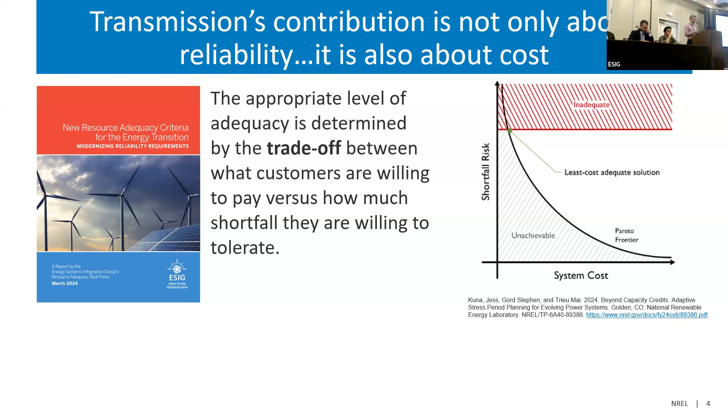This just changes a little bit how we consider the metrics for interregional or transmission in general, rather than just thinking about shortfall risk and our metrics for outages. We're also thinking about what is the cost to meet our target, in terms of dollars of capital investment and things like that.

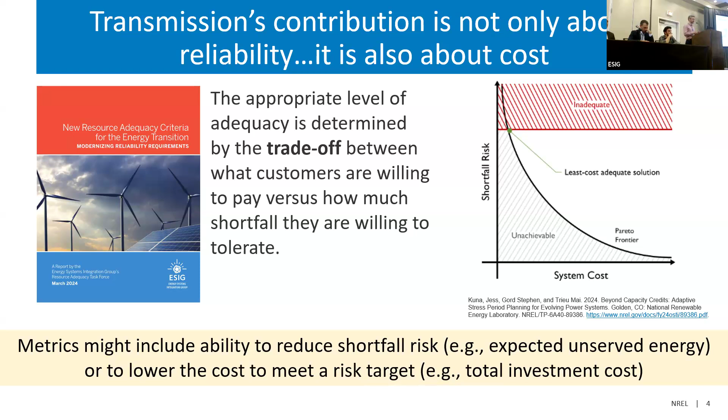I want to talk about a framework we've been using to explore this problem, linking capacity expansion modeling to examine this cost reliability trade-off in transmission. The approach is: you take a capacity expansion model and you have a reliability target, and you build a system that meets that target.

When you do that, you need to have some linkage with a resource adequacy tool to tell you, did you get to your target? Because usually the capacity expansion model is using a heuristic or a soft linkage to your RA evaluation metrics. So you use your resource adequacy tool, assess your shortfall risk, and then you can plot it. Here's where this particular build out landed.

Now you can go back and repeat this process, but establish it for different reliability levels. I'm going to change my planning reserve margin and see what I get, and I get another point. Maybe this is a system with a higher PRM, but now it's going to cost more, and it's going to have higher reliability. You do this again, you get another point. You get the idea. You're building out this curve, this Pareto frontier of what is possible in terms of cost and reliability.

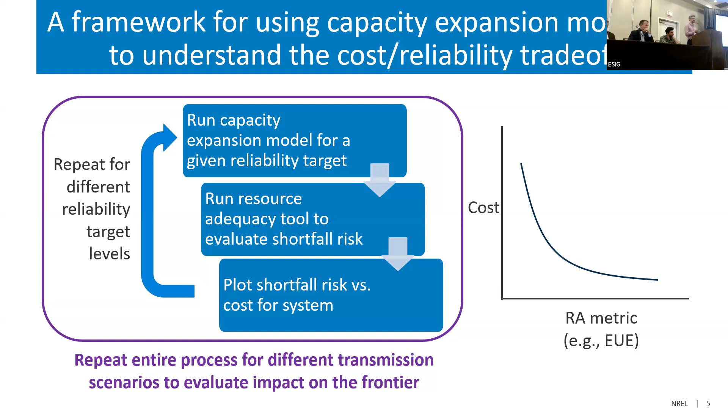But now we can take that whole process, put it in a box, and say let's rerun it, but for different transmission outcomes. Let's look at what is feasible in terms of different transmission buildouts. Maybe we have more restricted transmission siting cases, or we restrict the ability to build interregional transmission. When we do that, we're going from this base case to this other Pareto frontier. This is a world maybe we can't build as much transmission. We've now shifted this curve upwards in some way where we have a different kind of trade-off scenario between cost and reliability. That's the high level framework we're thinking about here.

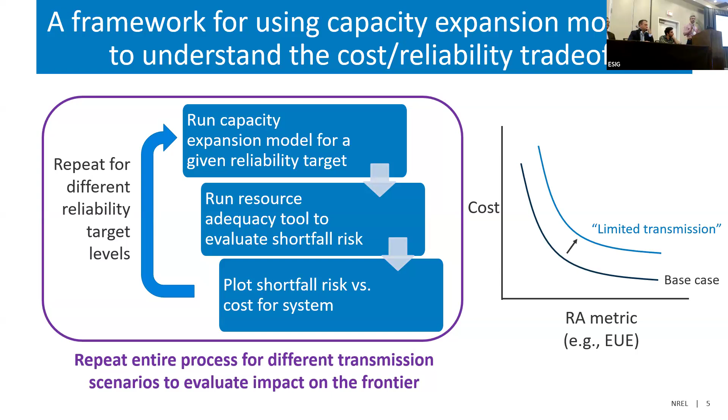We took this framework and applied it specifically to some of our modeling tools at NREL. This is particularly the ReEDS capacity expansion model that we're building from here. What we do is take ReEDS, which solves your capacity expansion problem for different steps. An input to that is your initial reliability target. In this case, a planning reserve margin that you want to satisfy, typically on the order of 12 to 18% above your peak load.

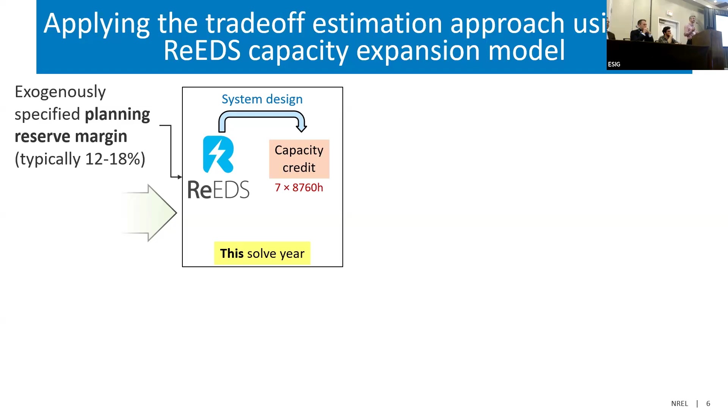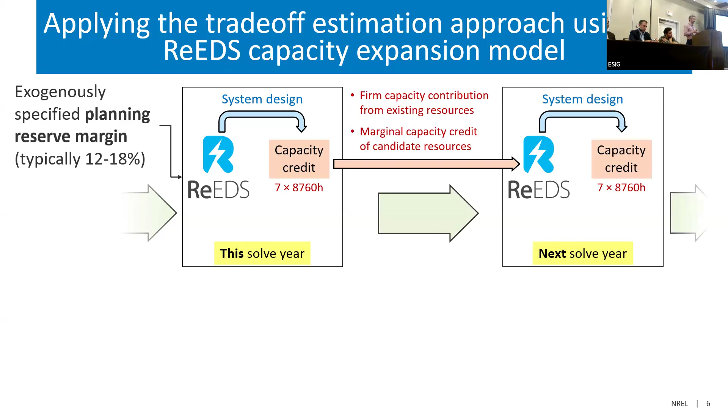And you've got your system design that comes out of ReEDS. You evaluate it against our resource adequacy analysis. Here is just a capacity credit calculation that then feeds into the next solve year. So we take firm capacity contribution from the resources you build out, as well as information on what the marginal contribution for future resources would be. That goes into the next solve year and so on. This is the linkage we have in our base ReEDS model for building out a system and then evaluating its performance.

Once we do that, we can take the final build out and do a more detailed resource adequacy analysis on it using a different set of tools. This is a resource adequacy tool called PRAS, also developed at NREL. The advantage of this over ReEDS is it has the ability to conduct probabilistic analysis with many draws from different outage probability failure rates. So you're capturing some of the correlated risks that you don't capture in the capacity expansion model. From that model, we can get metrics like expected unserved energy, and in this case I'll show normalized expected unserved energy for the system build out.

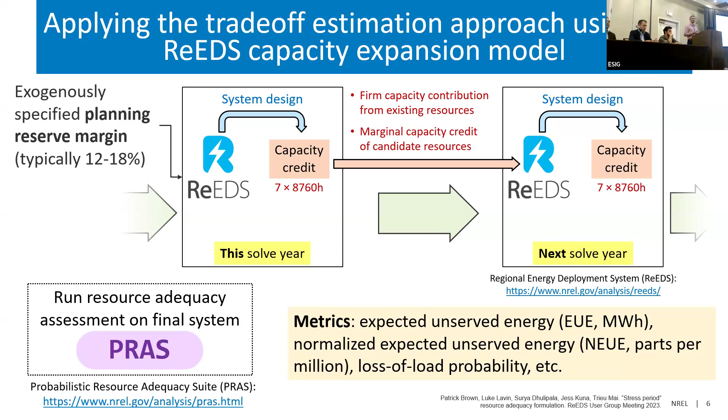And then a really extreme case is just no new transmission at all. We also study the impact of the different transmission scenarios on these Pareto frontiers under different emission scenarios - looking at a business-as-usual case, but also a zero carbon case where we're trying to achieve a zero emissions target for the system.

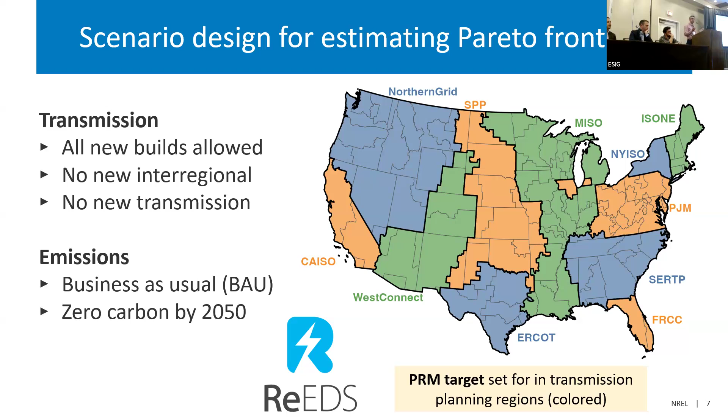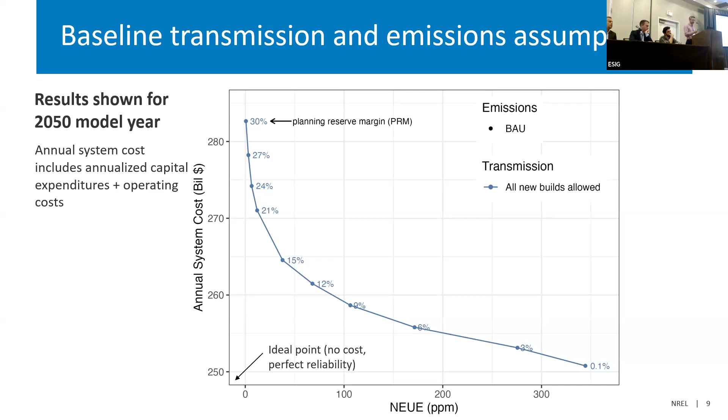A 15% planning reserve margin is maybe one I've often thought of as a baseline level. You can see here that at that system, you've got an annualized system cost of 265 billion, but more importantly, a normalized expected unserved energy of 38 parts per million. This suggests that 15% is missing some things in the model - that planning reserve margin is not capturing some of the outages that we're seeing in a probabilistic resource adequacy model. So maybe that's not getting you far enough along if your goal is to get to a lower expected unserved energy than that.

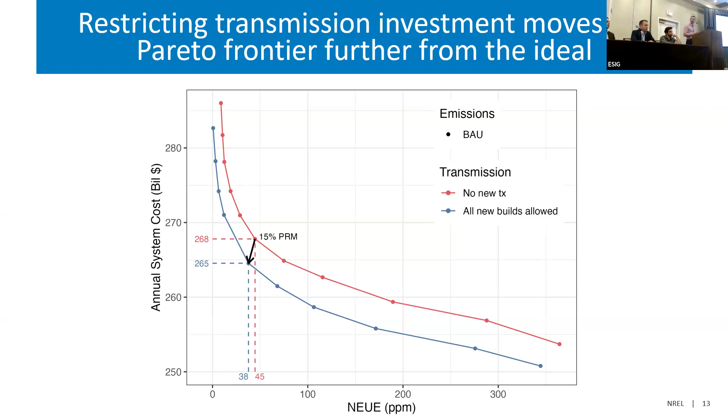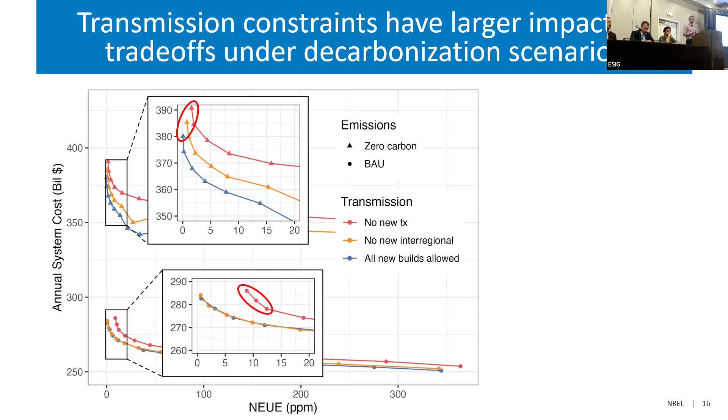And then if you look up here, you can basically see it: even at high levels of reliability, under the deep decarbonization cases, you're getting about a $10 billion annually difference in how much that system would cost when you are taking away the option to build new transmission. For context, it's $180 billion annually estimated for capital expenditures for all investor-owned utilities, and 20 to 25 annually in transmission expenditures. So this feels like a fair amount of money relative to what the system has to build out, and again just suggestive of the importance of transmission for this cost-reliability equation.

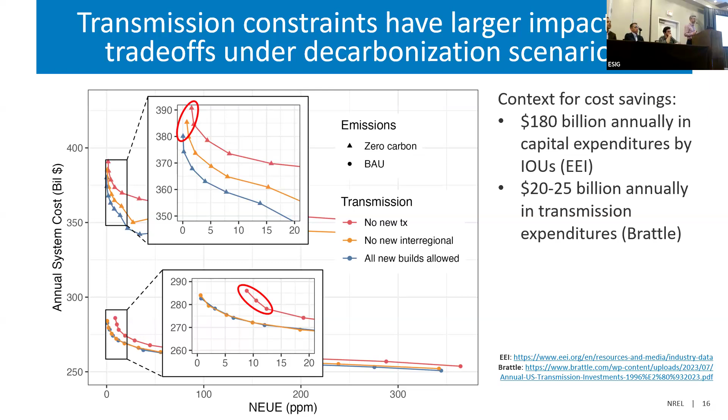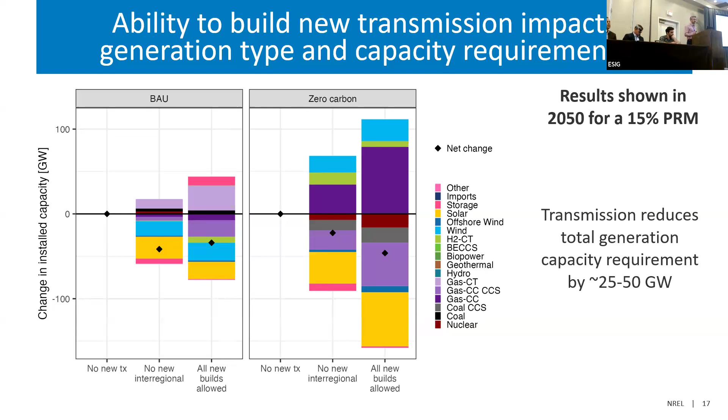In the BAU, that helps displace some mix of resources with the ability to build a little bit more CTs as peakers. But in the zero carbon world, that results in being able to completely offset gas CCS in favor of combined cycle that's utilized a little bit more effectively, enabling more wind. Overall, we're seeing a reduction in 25 to 50 gigawatts of capacity, so that's a consequential impact as well.

So just to close out, this is sort of an ongoing effort. I think we have a lot more work in this space that we're interested in doing. We'd really like to explore this trade-off estimation approach with a wider suite of scenarios. What happens if there's more demand growth because of electrification? How does this change in different weather years? What's the interaction of transmission and wind siting availability and deployment opportunities?

Also doing some more resource adequacy focused work, where you look at a specific transmission corridor, maybe remove it, and look at the impact on resource adequacy, but doing that for some of these future build-out systems. And then lastly, improving coupling between capacity expansion and resource adequacy tools. I'll talk about this in just a second, but we have more work in that space. That said, we're really interested in suggestions from folks on where this research stream should go.

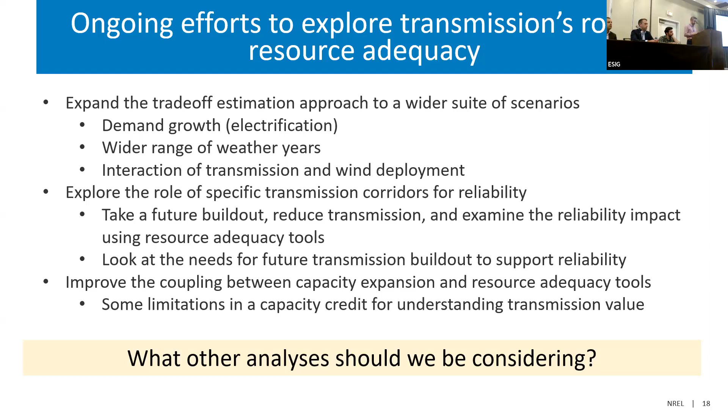And then just to close out, to touch on that last piece: the approach I presented today is using the traditional ReEDS formulation, which involved solving the capacity expansion problem and then calculating capacity credits for those solves, and moving forward in time.

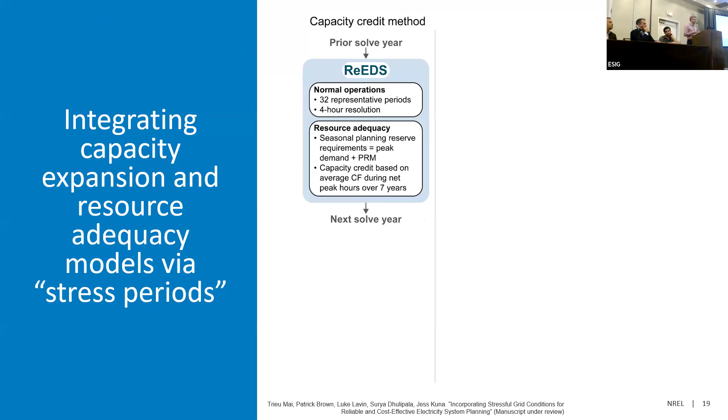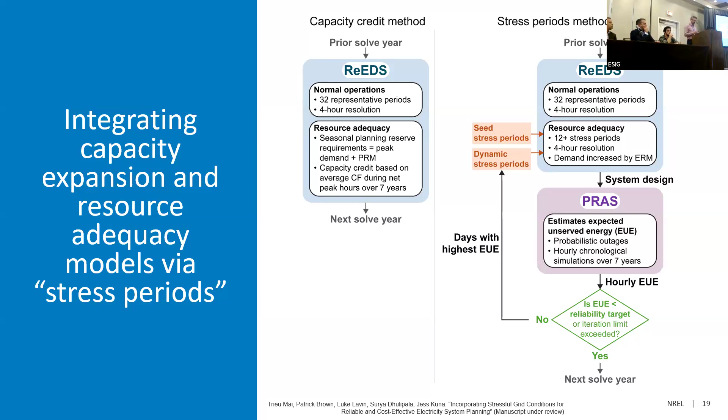But that has some limitations, particularly for assessing the value of interregional transmission. So we've been working on a new approach where we directly integrate the probabilistic resource adequacy tool and have feedback where we generate new periods to model directly, trying to capture some of that outage representation. That's where we think we're headed, and something we'd like to continue exploring, particularly in the context of interregional transmission. So with that, thank you very much for your time, happy to take questions throughout the session.

All right, hi everybody, I'm John Moura, Director of Reliability Assessment at NERC, and I'm going to talk about our interregional transmission, interregional capability study, the ITCS. I'll say that a couple times.

Thinking about it at a high level, think about what's needed for the system as we're growing, seeing more extreme conditions, the need to solve issues that can't be solved internally because of resource mix options we're constrained with, but also being able to integrate resources that want to come to market that might be distant from load. So I think it's important to set the table a bit.

And talk about why this is on our mind and why this has become more of a challenge in the past, especially the past 10 years. Setting the table, over the last 10 years across North America, we've really reduced the amount of capacity on the system when you look at peak. And that's kind of hard to grasp, right?

We built so much solar, so much wind. How can the actual capacity go down? But of course, we've retired a lot of units. And when you look at that on-peak capacity component, particularly during the winter, we've actually decreased the total amount of capacity on our system by about 4%. I'll go top left and then bottom left here.

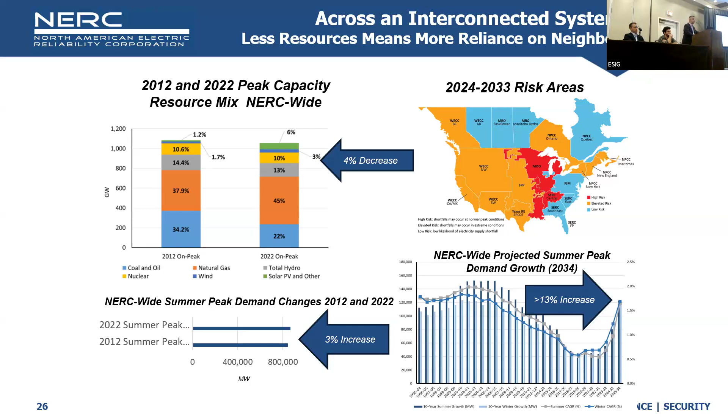And so there's a couple pretty good examples that get us into these tail events where interregional transmission is really the one solution that we know how to do that can really help. So with our wind group here and renewable group, I don't know if anyone knows what happened on June 6th of last year. Most people don't know, and that's because the system operated and performed as expected.

But on June 6th of last year, if you look from the bottom of Texas all the way to the top of Saskatchewan - that large swath of the country - there's about 60,000 megawatts of wind installed in that area. And on June 6th, it was outputting about 300 megawatts.

I know we have some international folks - I don't know if any German - but the Germans have a word for this, it's called a Dunkelflaute, a kind of energy drought, I heard at the last session. And these are things the Germans see, right? They've got a lot of wind, a lot of solar, and it's something we need to be prepared for. It's part of our design criteria that we really need to be able to operate the system even when we don't have sun, when we don't have wind. What are the resources we're going to rely on from our neighbors to maintain reliability?

And of course, I should mention, very different story, right? If that happened in July 6th or August 6th, when you didn't have enough excess generation from our neighbors and you're kind of limited in options.

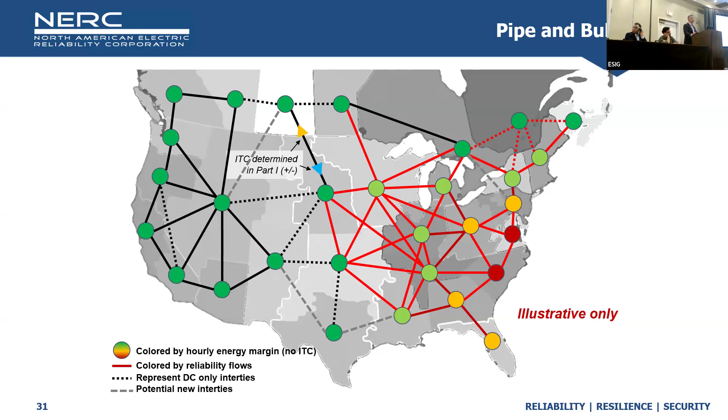This is just an illustrative version of what our study looks like. You have the bubbles that look at the energy availability within each area. If it's deficit, it's red. If it's in excess, you're green. That's kind of the energy part of the study. And then what we do is the transfer capability part, identify recommendations for prudent additions, and where there are deficits, we look to their neighbors to see if there's excess at that right time and right place. And then if there is, we're able to recommend those prudent increases.

I'll just quickly flash this. This is just import capability for a summer peak. You can see they're all over the place, ranging from 1% in Texas. I think we know that. But very high in other places, 92% in the Northwest and others. And we kind of understand that, right? The Western system's kind of built for that.

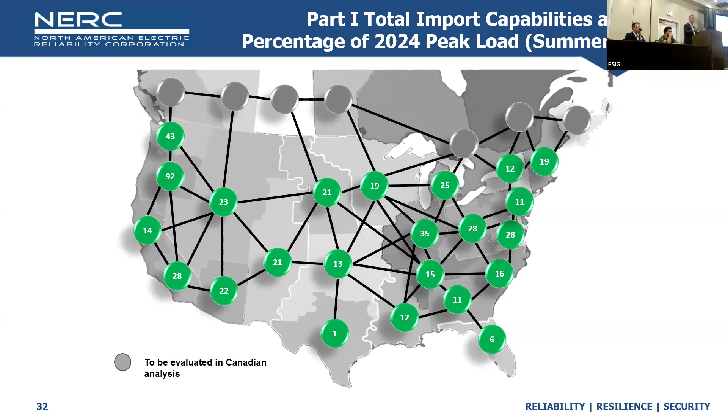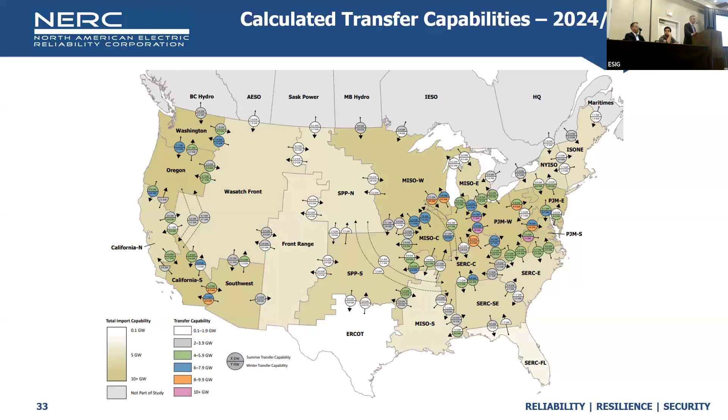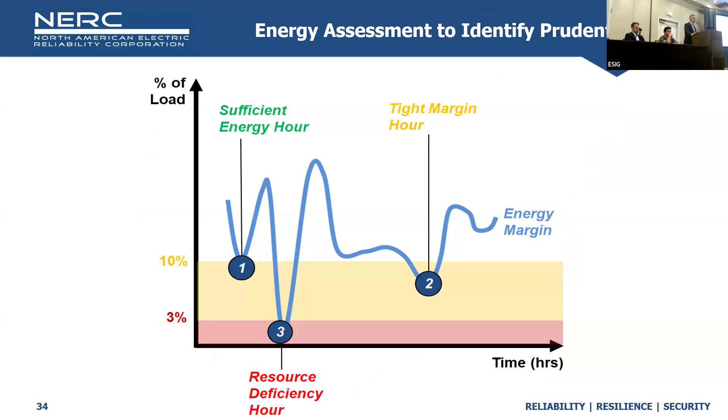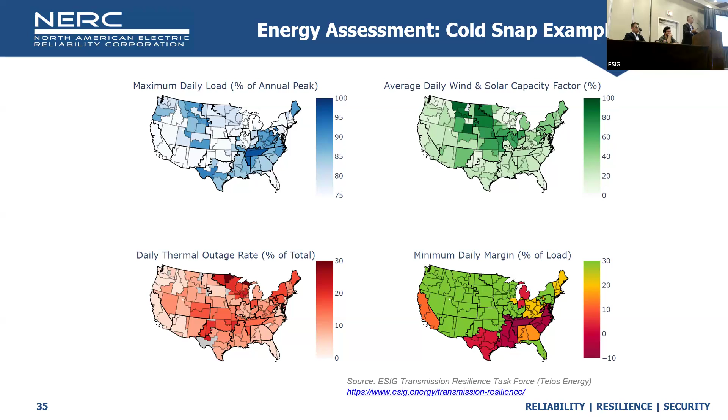Behind every one of those bubbles, we're identifying areas where there's a resource deficiency and highlighting that as a need. We do hourly forecasting, hourly modeling to take into account the daily loads. We've got 12 weather years that are synchronized with load and resources. We're looking at wind and solar capacity factors, the daily thermal outage rates, and we're ultimately able to get to some energy margin level. Take all that, keep going, and give you some results here.

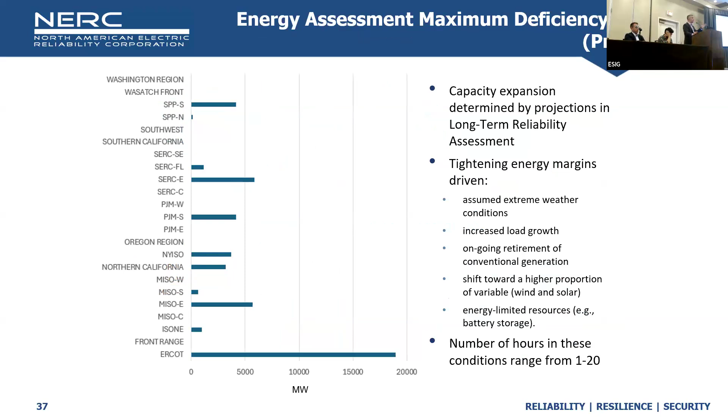So in some areas, these are the energy deficits that were identified. They range here. Most of the energy deficits are in that slightly less than 5,000 megawatt range. But a couple stand out. ERCOT, of course, mostly because of the weather year of Uri that really drove a lot of the resource deficiencies.

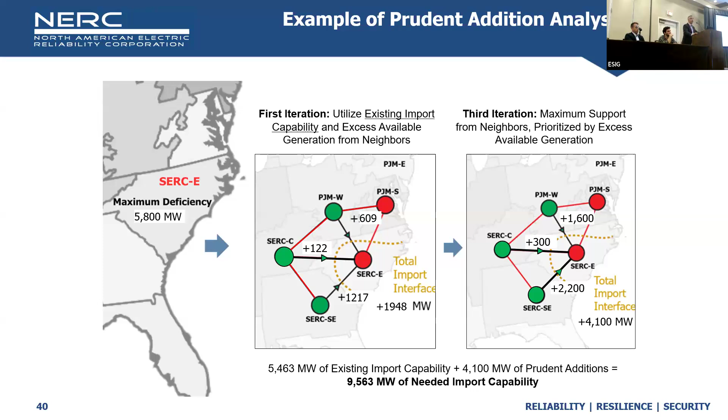So some really good insights around how storage, demand response, all of these things that we can move around can actually minimize the need for transfer capability.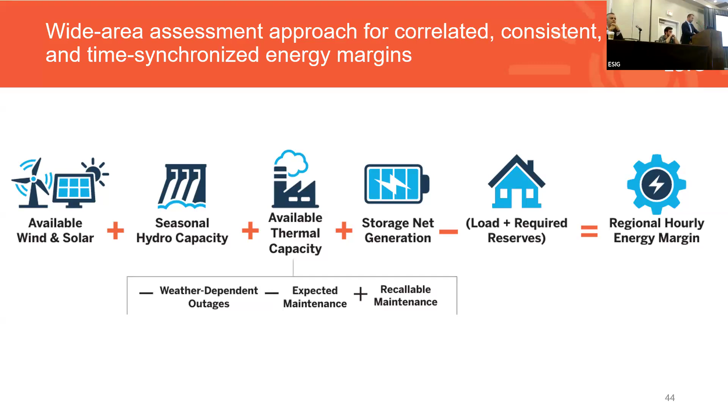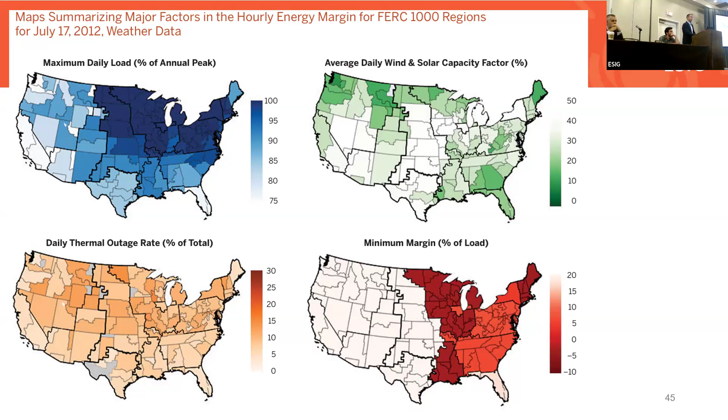And so this is showing that geographically across the whole country, and we actually have Canada included as well. Just simplified the chart. And this is for one point in time. Now we replicate this every hour across 12 weather years, and we're getting this full 100,000 hours plus of what resource availability looks like for each region and the transfer capability between them and how we might see some of these reliability flows.

Now, I talked about how we can combine this with the resource adequacy criteria report. And so in the ESIG RA criteria report, there's 3 main recommendations that came out of that. One was to transition to a multi-metric criteria. 2 is to specifically consider extreme events. And the 3rd was to incorporate economics. I'm going to focus solely on that middle one. Like, why do we have to think about specifically considering extreme events?

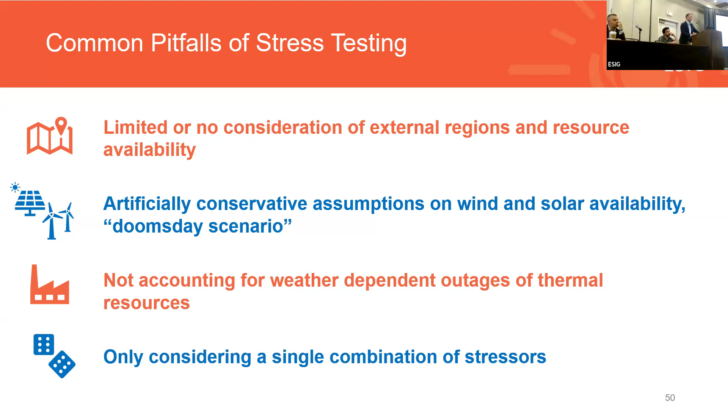There's a few other things, but we wanted to apply this to an SPP case study. The reason for this was twofold. One was to really bring this into a planning process and get more specific about a region. But another was to inform how we take some of these wide area assessments, like the work John was showing that said here's the entire North American system, and then how do we take that framework but apply it to a regional planning study.

I think John and anybody else doing these wide area assessments will be the first to say those are not meant to replace local or regional planning. They're used to inform it. So how do we use that wide area work and then insert it into a regional planning model?

Oftentimes you'll see folks like SPP or MISO model their system in a high degree of fidelity and then make approximations, basically saying we're going to assume no more than 4,000 megawatts is available from the neighbors. How can we marry the best of both worlds?

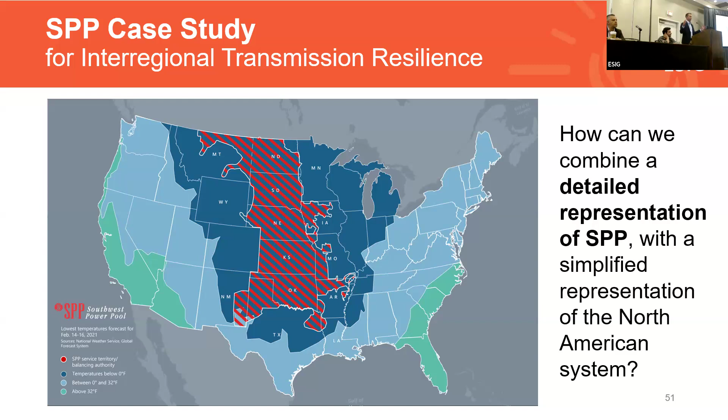What we tried to do here is really in-depth modeling of the SPP footprint, but bring in that energy margin assessment from all of the neighbors. So we could say, when we're evaluating SPP's stress conditions, what do all of the neighbors look like? SPP is a great case study for this because it has a lot of neighbors, spanning a lot of different geography and a lot of different weather zones.

So to do that, we looked at three stress tests. One was an extreme cold event, Winter Storm Uri in 2021. The other was an extreme heat event in 2011. And each of these we looked at for a two-week period. Another one was a wind drought very comparable to the one John referenced.

So we took those each for two-week periods and ran them through 50 stress samples. We looked at them with different combinations of thermal forced outages, renewable generation, maintenance, and transfer capabilities from outside, and also different load levels.

The key thing here is we took those deterministic stress tests and brought in some variability around that, but made sure to preserve what was happening in all of the neighboring regions. So when we sampled different levels of renewables, we did that in a consistent manner that preserved the geographic correlation with all of its neighbors.

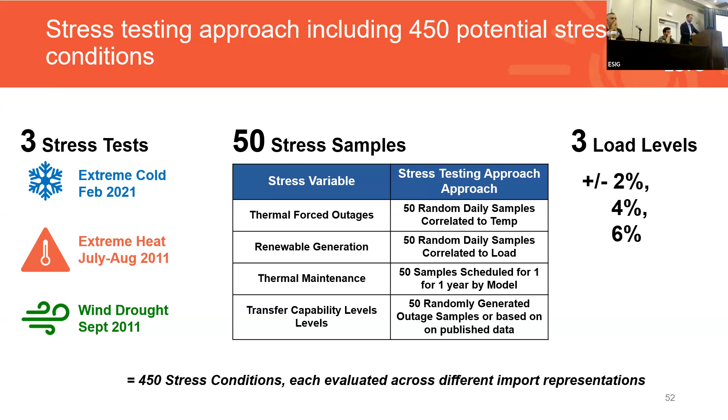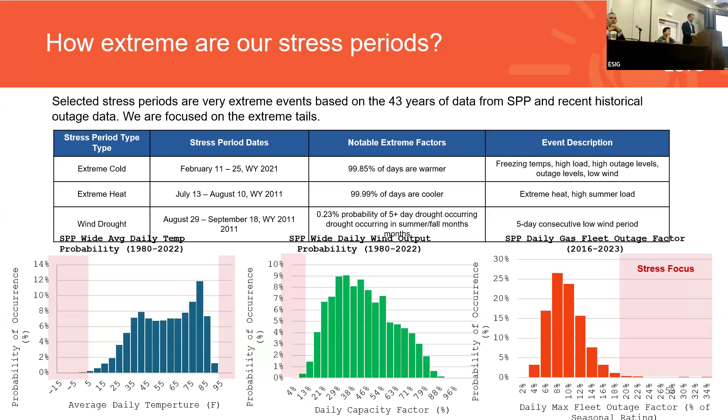When we think about transmission for resilience, we want to look at these periods in particular and ask: what's the availability of resources on the other end of that line? When we do rely on the resource, how often do we rely on it?

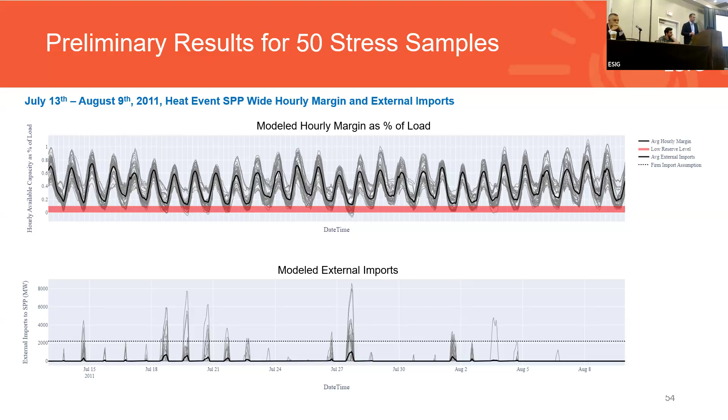This work is in progress. We have a little bit more to do to finalize the stress test conditions and really evaluate those interregional transmission options, and quantify the availability of those external resources compared to in-region resources. We want to consider future systems, applying this to a higher renewable, higher electrified scenario.

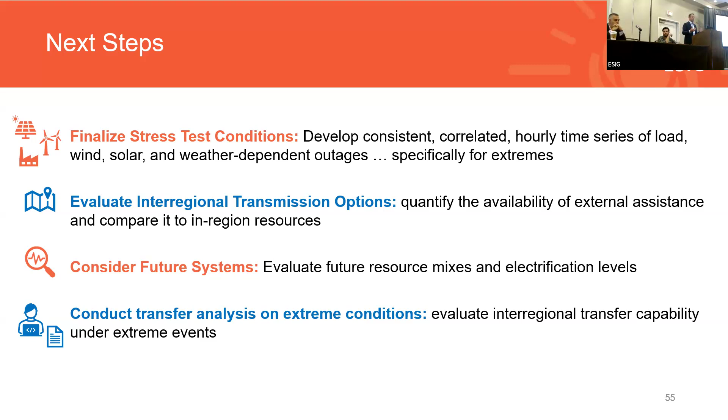Hopefully in maybe a part 3 we can understand the transfer analysis during those extreme conditions. The work John was showing talks about the transfer analysis between one region and another, typically done on our standard summer and winter peak. We want to look at whether, during these specific stress conditions, that transfer capability changes significantly.

All right, thank you very much.

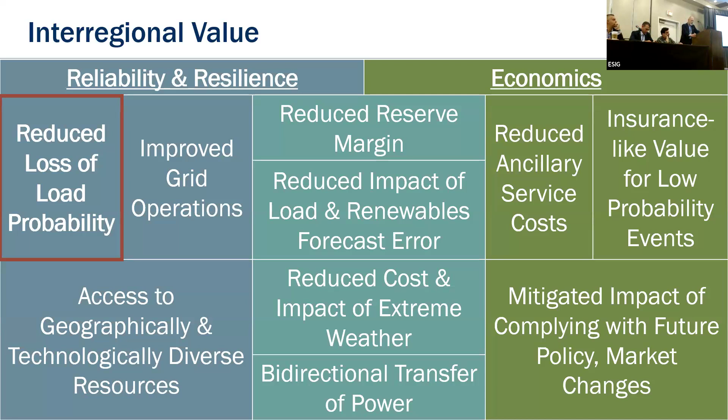So when the Pacific Northwest is peaking, what's happening in SPP and MISO? You can see that they're approximately 80% of their peaks. Similarly, when you look at SPP peaking, the Pacific Northwest is only about 87% of its peak. Same thing with MISO — when MISO is peaking, the Pacific Northwest is at 84%.

This is from the DOE National Transmission Planning Study and shows that the load is not coincident in these regions. So that's one metric into a loss of load expectancy.

The other metric is that nowadays all of our regions are dependent on variable generation, and variable generation is also dependent on the weather.

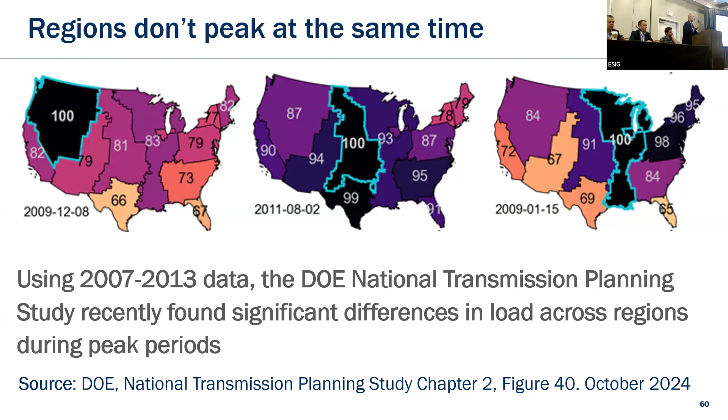So then what we did was we hired Astrape Consulting to perform a loss of load expectancy analysis. This is kind of the pipe and bubble diagram. What's interesting is in their pipe and bubble base case, they didn't even have connections between MISO and WECC, so they had to create some new connections.

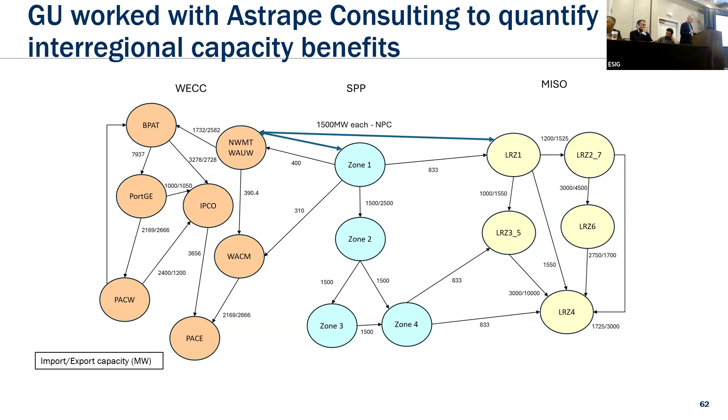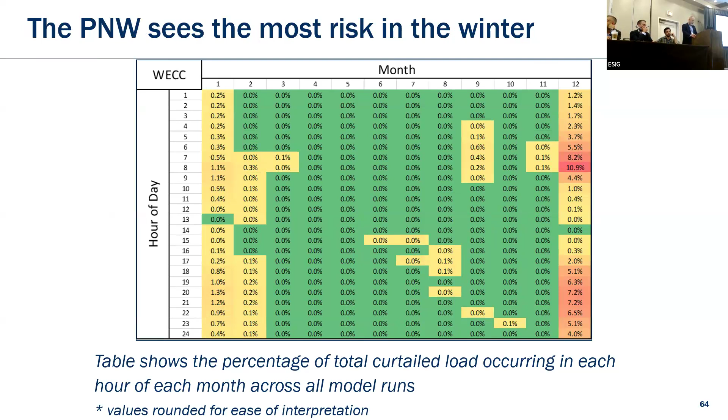So this is kind of leading up to the results, and you look at the results that are post and pre, and they're phenomenal, right? They go from 0.1 to 0.02. That's huge, right? 5x. That's a tremendous difference. The problem is I have no idea what these numbers mean. But it's important, right? They're important.

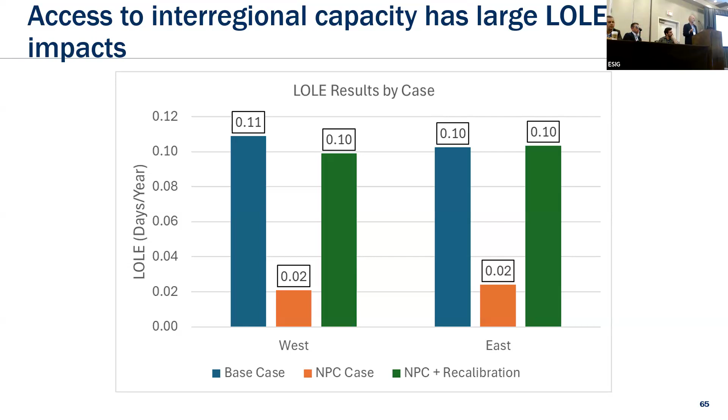I mean, how do you translate it, right? So I asked my team, guys, you got to make this understandable, right? So the team went back, and what they did was they went into the base case and started inputting perfect generation, to see that, okay, if the systems were still disconnected, in order to see that same decrease in loss of load expectancy, how much generation would you have to add to the system to achieve that same reduction, right?

Well, I understand this. I understand megawatts, right? So the impact of the interregional line is the West is seeing almost 1,800 megawatts of capacity, and the East is seeing 1,750 megawatts of additional capacity just from this interregional line. And it's pretty amazing because the line is only 3,000 megawatts. When you add the two together, that's more than 3 gigs, right?

But it's consistent with a previous, I think, a DOE study or NREL study that showed what happens when you connect MISO South and MISO North. The other amazing thing here is this value is understated because this is perfect capacity, right? And generation has a forced outage rate of 5%, right? So this value is actually more than that.

But for us in the United States, this is a huge paradigm shift. How can transmission lines have capacity associated with it? That's kind of heretical almost. But that's what's done in Europe. We call our lines interregional lines, they call them interconnectors. And when they build their interconnectors, they actually assign a capacity value to it, right?

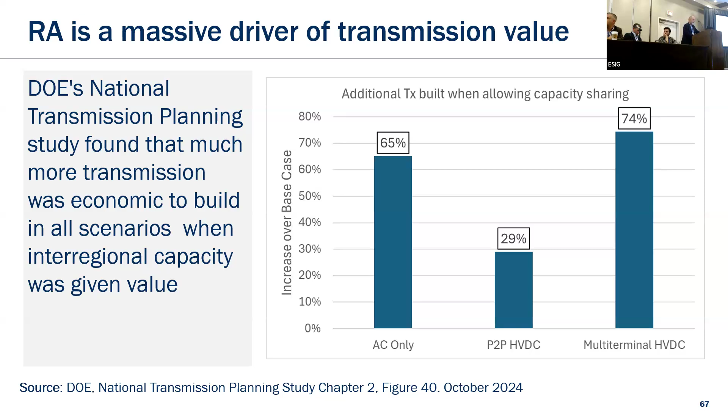So this kind of leads me to my last couple of slides and points here: the ISOs do a poor job—some of them do a good job, some of them do a poor job—of crediting interregional flows. I think the ISO that does it the best is probably New York. They assign value on their interregional lines that in times of stress, there's an opportunity to be importing. Other regions don't assign hardly any value to their interties.

And why that is important is if you don't ascribe any value to your intertie flows, then it's really hard to justify interregional transmission lines. So the status quo as far as resource adequacy goes on interregional lines tends to be backward looking. We look at what's been historically done. But if you do that approach, then you would come up with a zero value for North Plains Connector because it's a future project, right? So there needs to be some sort of mechanism to proactively accredit new lines in order to help facilitate their development. That is my last point.